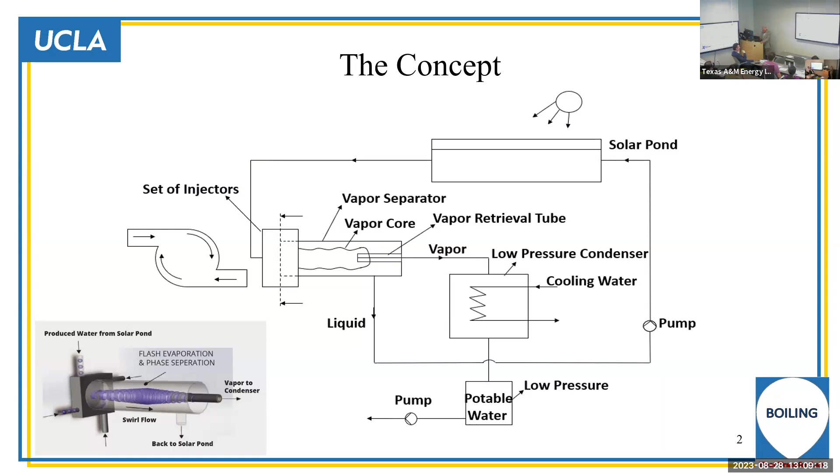There are a number of existing technologies for desalination: multi-effect distillation, multi-stage flash evaporation, and reverse osmosis. Reverse osmosis uses membranes to separate pure water from saltish water, and this is quite popular. However, this requires quite a bit of energy consumption.

Then there's multi-stage flash evaporation. There you use low pressure steam to heat salt water, and then the salt water flashes when the pressure drops below a certain value, so the saturation temperature is lower than the saline water temperature. The vapor that is produced is sent to a demister to get rid of droplets, and then the vapor goes over a condenser to form potable water, and in turn the saline water is heated. So this is the process.

Multi-effect distillation is similar, but in this case seawater is sprayed over heat exchanger tubes. These heat exchanger tubes carry steam, so steam condenses, and the energy that is released is utilized to heat the saline water. As the pressure drops, the saline water becomes superheated, flashes, and vapor is produced. That vapor goes through a demister to get rid of droplets, and then the vapor is sent to a heat exchanger and the process repeats.

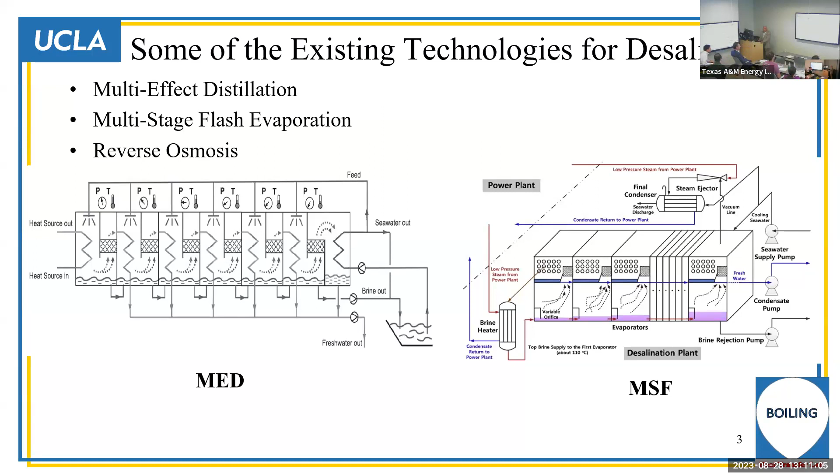So my talk is organized as follows. First, I give you a brief history leading to this concept. We started with just simple phase separation in the absence of gravity.

This work started when President Reagan had the Strategic Defense Initiative in the late 1980s. At that time, the idea was to have a nuclear power plant in space, and to produce electricity, one of the concepts was to use a Rankine cycle.

In a Rankine cycle, you produce steam, and now you have to separate steam from the water. Normally gravity helps you separate the two, but in space there is no gravity. So we had to come up with a concept to separate water from steam. So here we developed this phase separator.

Subsequently, we used this concept of swirl flow for enhancing single phase heat transfer and two phase heat transfer. Then I'll come to the current concept and what we have demonstrated, and lastly give you some simple cost analysis of producing potable water from seawater using this concept.

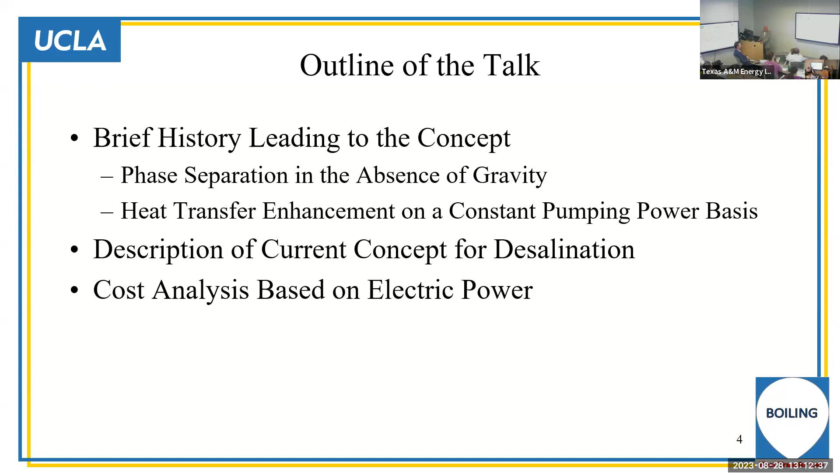So going back to phase separation in the absence of gravity, what we proposed was that we place a set of injectors on the separator tube. These injectors were pushing the two-phase mixture, air and water, or steam and water, tangentially into the tube, and they were also inclined at about 70 degrees to the main axis so that we impart axial momentum to the two fluids as well.

As the fluids come out of the injectors, again centrifugal force pushes the liquid out. Gas is formed as a core in the middle, and we take the gas out through a retrieval tube - at that time we called it a vortex finder - so that you're separating the two. And the liquid goes out and goes to the main source.

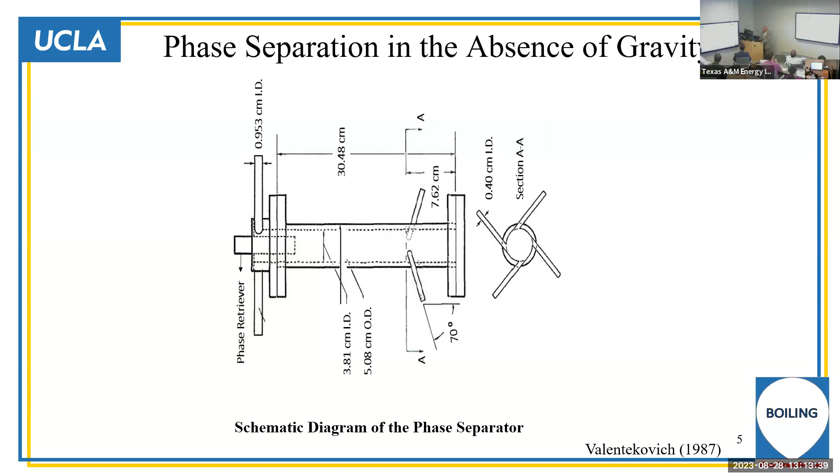This is a picture that was taken in the 1980s. You see in the middle is the gas core, and on the left-hand side is a vortex finder or retrieval tube. You can see the gas core just feeds into that retrieval tube.

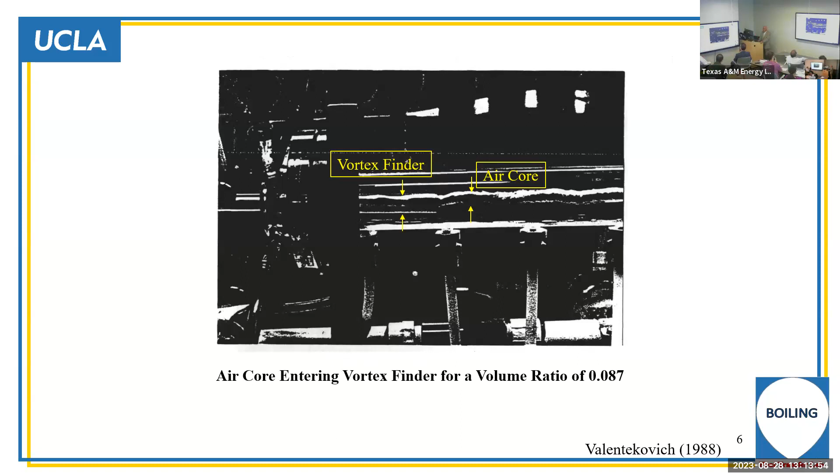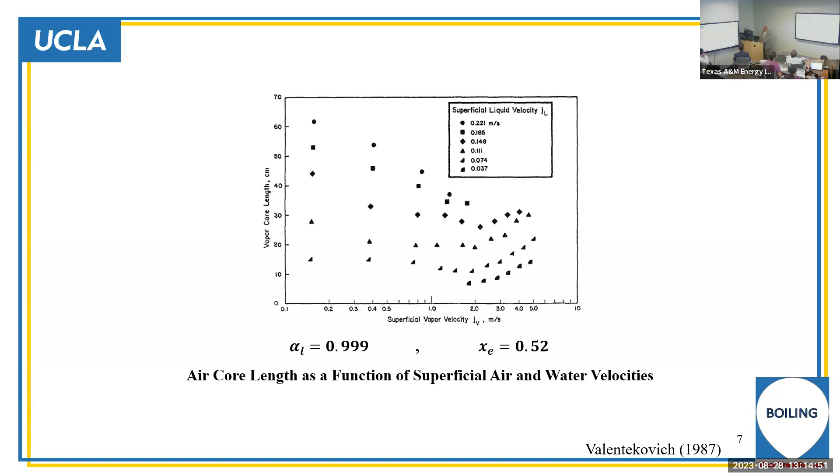That work was funded by the Strategic Defense Initiative. Next, we moved on to using this swirl flow enhancement for single phase flow. We got funding from the Gas Research Institute when they wanted to improve heat transfer in their heat exchanger tubes.

Here we have a set of 4 injectors placed on a tube which is electrically heated, and a single phase liquid or gas enters through these injectors, creating tangential momentum. We define tangential momentum as the square of the mass flow rate of the injected fluid divided by the density of the fluid and the area of the injectors. Then there's a total momentum transfer rate, based on the total mass through the tube, since there is some axial flow as well.

On the left-hand side, you see the ratio of Nusselt number, a dimensionless heat transfer coefficient, non-dimensionalized with that for fully developed flow. The triangles are for single phase axial flow, and you can see that within about 5 to 6 hydraulic diameters, the enhancement to developing flow dies down and you reach a fully developed condition.

But with tangential injection, we find that the enhancement near the inlet increases with the momentum ratio, and for a momentum ratio of about 5.2, we got an enhancement of a factor of 5. This enhancement decays but persists up to about 70 hydraulic diameters. That's quite long.

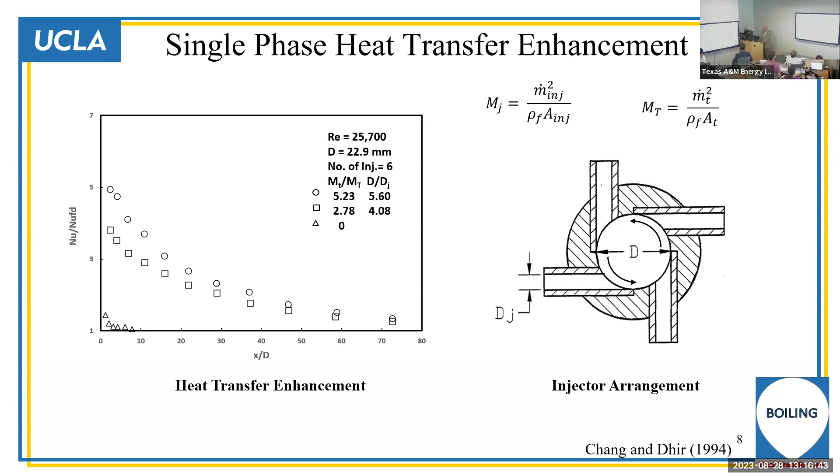Then we wanted to see why swirl flow enhances heat transfer, and what the mechanism is. First, we measured the temperature profile in the tube, and found that because of the centrifugal force, colder fluid was pushed out, so the temperature away from the middle of the tube was less than that at the middle.

These data points show the temperature profile with swirl flow, and the dotted line is turbulent flow fully developed in purely axial flow. You see in this case there's quite a bit of depression in the temperature and a very steep gradient near the wall.

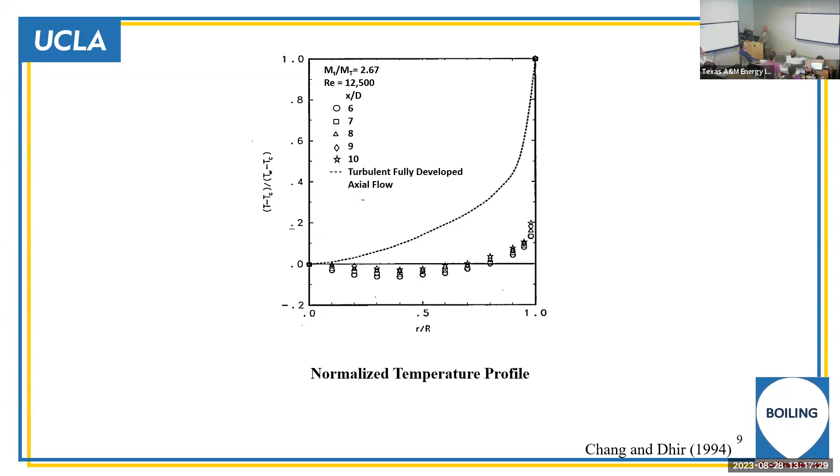Then we wanted a correlating parameter. Momentum ratio is one way of doing it, but we defined swirl intensity, which is the integrated value of the rate of tangential momentum divided by the rate of axial momentum. Swirl intensity was the key parameter we used for correlation of the data.

On the left-hand side, you see a plot of enhancement in heat transfer as a function of swirl intensity. As we increase the swirl intensity, heat transfer improves. For a swirl intensity of about 5, heat transfer is enhanced by more than a factor of 2.

These data were obtained at axial distances greater than 6 hydraulic diameters.

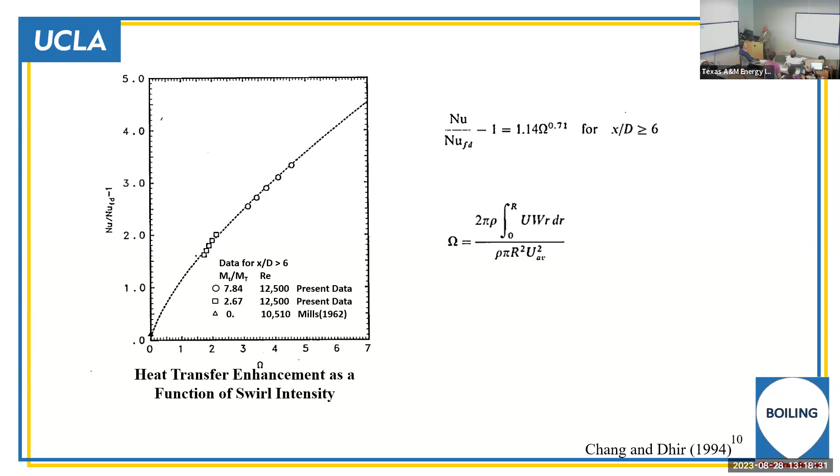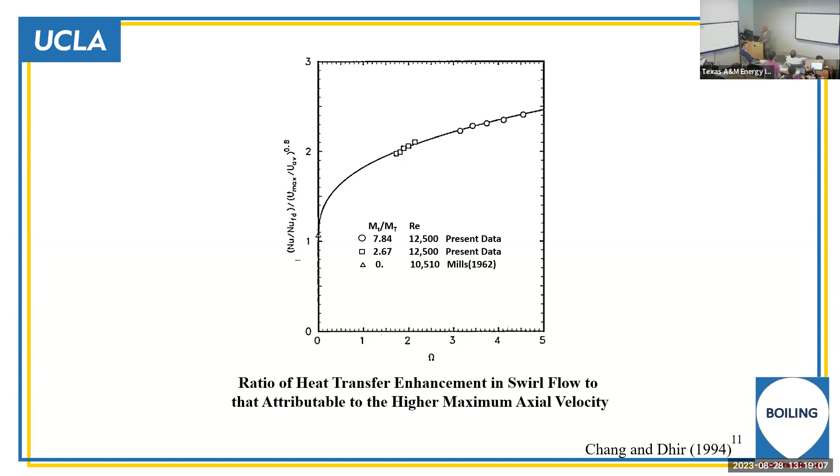Then we found that this enhancement would be related to the maximum axial velocity in the tube. When we normalized the data with maximum axial velocity, it correlated well with the swirl intensity, indicating that swirl increased the axial velocity near the tube surface. Again, the enhancement increases as swirl intensity increases.

Then we measured the turbulent intensity in the tube using an anemometer, measuring 3 components of turbulent intensity, integrated over the cross section of the tube and normalized with the average axial velocity. On the left-hand side, you see turbulent intensity as a function of swirl intensity, increasing almost linearly with swirl intensity.

So this tells us that swirl not only increases the axial velocity component near the wall, but also increases turbulence intensity, which improves mixing and heat transfer. So there are two mechanisms of enhancement of heat transfer this way: increased axial velocity and increased turbulence.

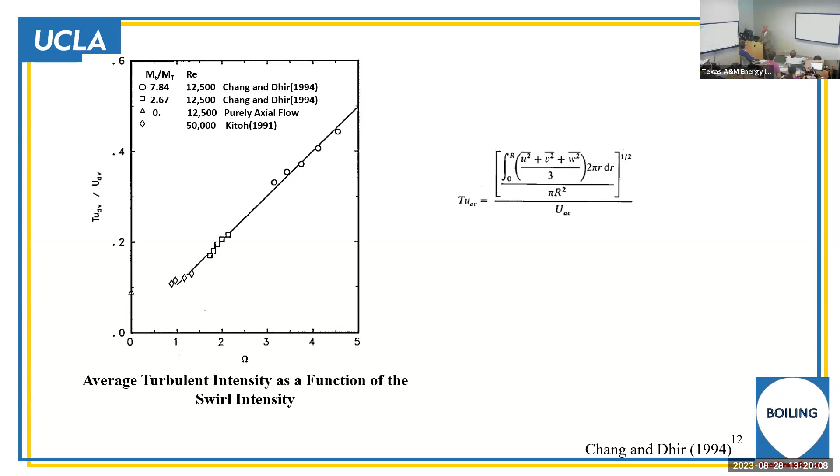We got a patent for this work, and it was, as I said earlier, supported initially by the Gas Research Institute. Then after this, we said, why not two-phase heat transfer, boiling?

Boiling is already associated with very high heat transfer rates, but with swirl, could we do better? In boiling, critical heat flux occurs when vapor bubbles combine on the wall because the vapor production rate exceeds what is removable, so bubbles accumulate and blanket the surface with vapor, causing a drastic reduction in heat transfer.

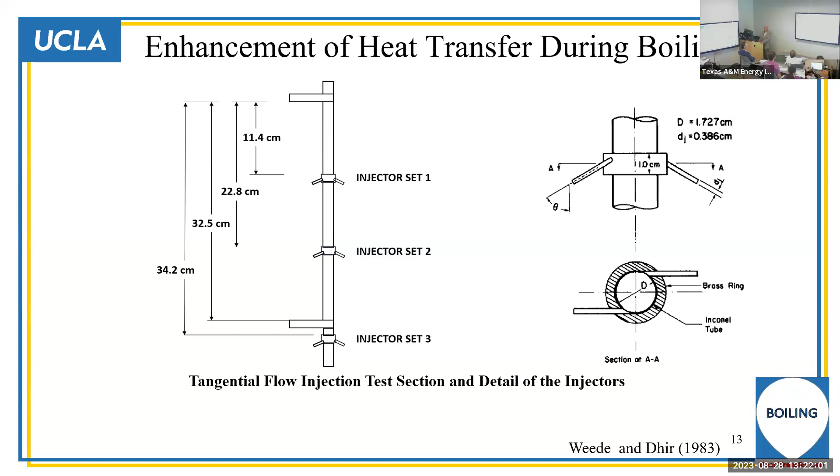Here is the enhancement for single phase, again using liquid rather than gas, as a function of axial distance for different momentum ratios. We see the same behavior: enhancement is much higher with tangential injection and lasts for long distances, compared to axial flow shown by triangles, which very quickly becomes fully developed in about 6 to 7 hydraulic diameters.

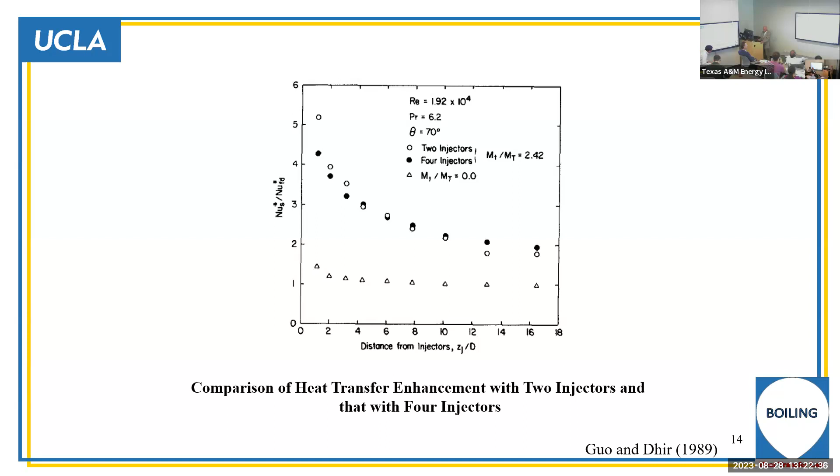Let's look at the two-phase boiling heat flux. The circles are purely axial flow, and the triangles are data with tangential injection. With tangential injection in partial nucleate boiling, heat transfer is enhanced quite significantly. In fully developed nucleate boiling there is not much effect, but critical heat flux with injection is higher than for pure axial flow. This is for an axial location about 6 hydraulic diameters from inlet.

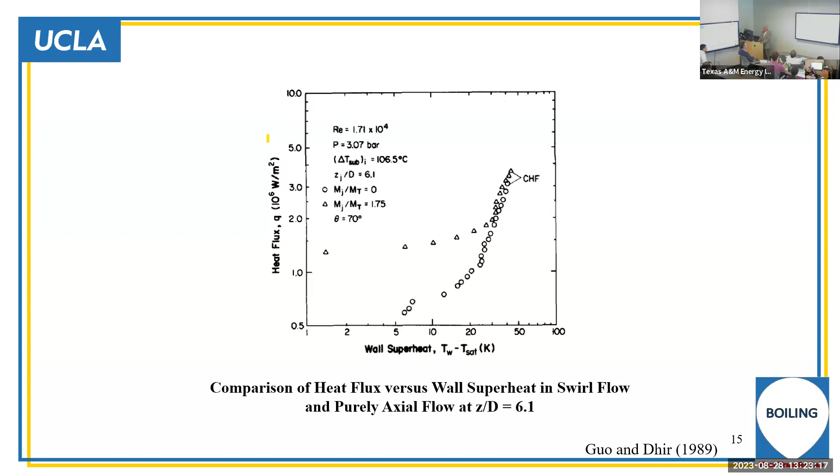Next we looked at 13 hydraulic diameters from inlet. Similar behavior: critical heat flux is again higher with swirl than for pure axial flow.

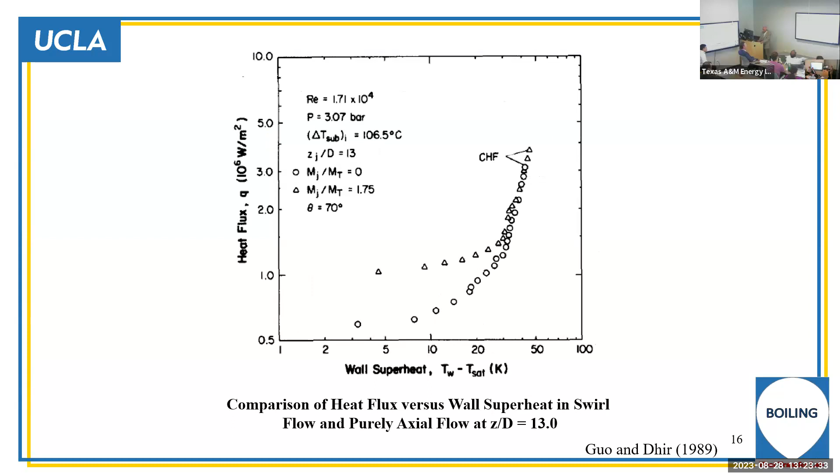When I showed this result to the person at DOE, he said, this kind of science I am not interested in. People are not really looking forward to new things, they want something traditional.

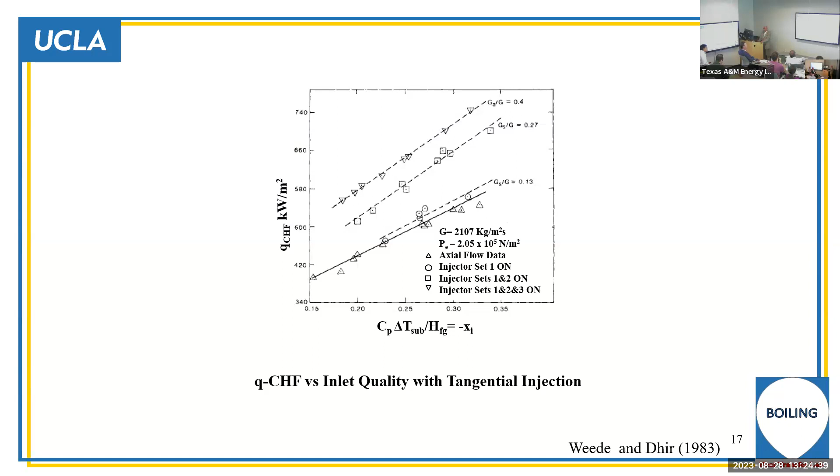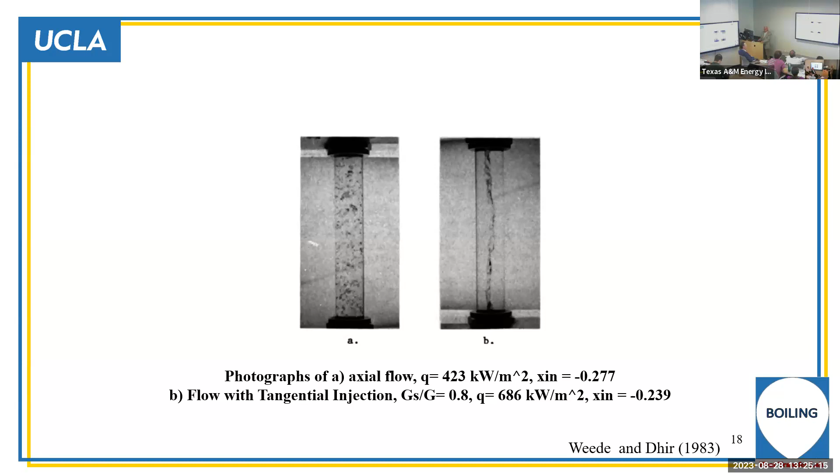Now, in this world there is no such thing as a free lunch, except for what we got to drink, so you have to pay some penalty. Most often people claim they enhance heat transfer without paying a penalty, but there is always something.

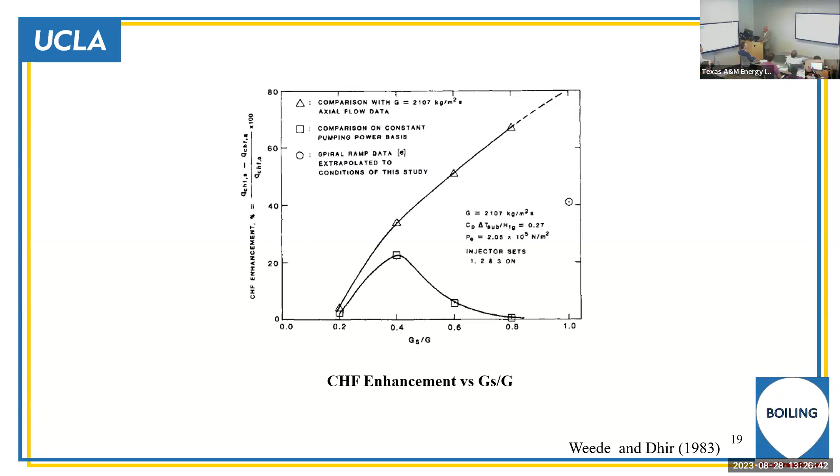Next, let's go to the current concept.

For the current concept, since in the lab we don't have a solar pond, we use electrical heating. We have a primary tank from which liquid goes through a heated section to reach a certain temperature, then flows through two injection tubes connected to two injectors placed on a separate tube. As the liquid flows through the tubes, the pressure drops, the saturation temperature drops, and when it is less than the liquid temperature, the liquid becomes superheated, flashes, and produces vapor.

So that is happening in the first stage. The vapor core forms, and the vapor from the vapor core is taken out. However, there's a problem - some droplets get entrained in the vapor. So we place a second stage next to the first stage. The vapor coming out of the first stage is fed to the second stage so that we can get rid of any droplets that are entrained.

The vapor from the second stage goes to the condenser and gives you the potable water. The liquid that is separated goes to a secondary tank, then the primary tank, and all that liquid is sent back to the primary.

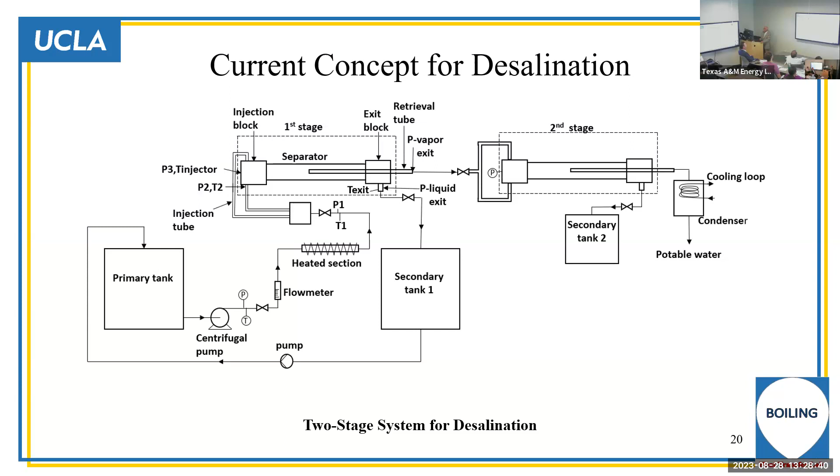As the vapor flows through the retrieval tube, there's a pressure drop.

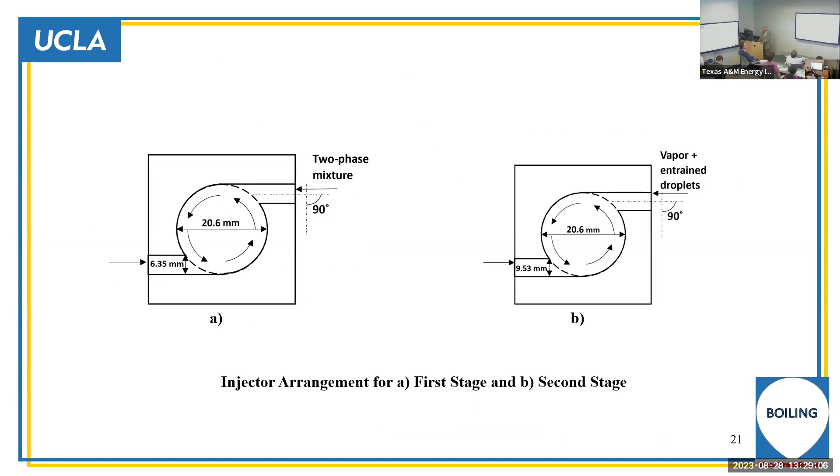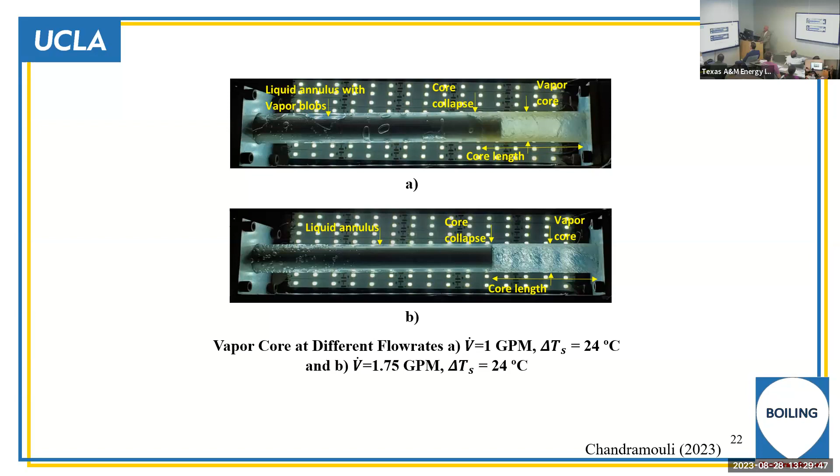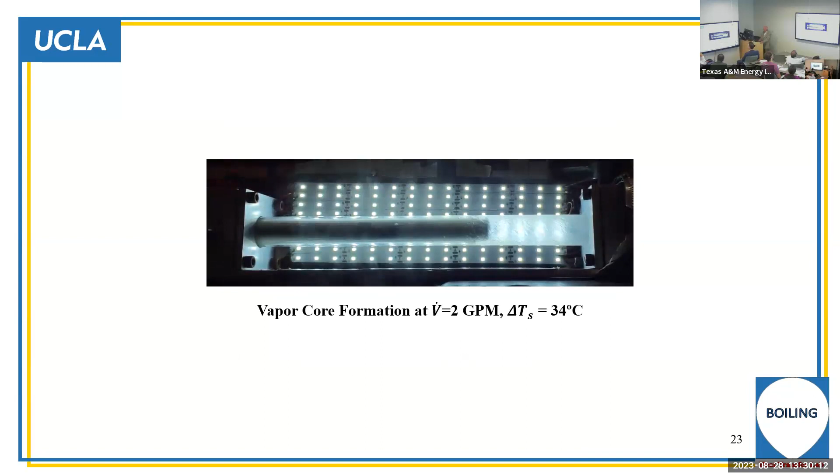Now, before I go further into what the correlations are, I want to define certain parameters. How do we know this system is working the way it is working? What is its performance indicator?

So for that, we first define a thermal conversion efficiency. Thermal conversion efficiency is simply the ratio of the maximum possible temperature drop. You have inlet temperature of the liquid, and then you have temperature of the liquid at the injector exit - that temperature would be more than the saturation temperature based on the exit pressure. So we define delta T injector, divided by the maximum possible temperature drop, which is the temperature of the liquid at the inlet minus the saturation temperature of the pressure at the exit. That exit pressure is the condenser pressure.

So this is thermal conversion efficiency, then phase separation efficiency - how better we are doing in getting rid of these droplets. You don't want the droplets because those are salt water, and that would reflect on the quality of the water that we produce. So we want to determine phase separation efficiency.

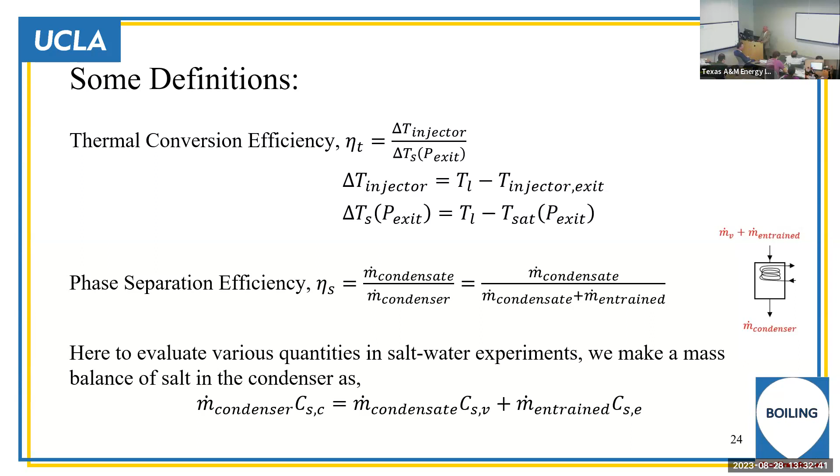In the vapor, salt concentration is 0. So we find that the mass flow rate of the entrained liquid is simply the mass flow rate of the condenser times the ratio of the salt concentration in the condenser divided by the salt concentration in the entrained liquid. In the entrained liquid, salt concentration is the same as your original water. In the condenser, you measure it - so what is the salt concentration?

So knowing the entrained water, we can calculate the mass flow rate of the condensate, and from then you can determine what the separation is.

Another parameter we define is collection efficiency. When we separate the liquid and vapor, some of the vapor goes with the liquid that we took up - that is your product which is being wasted. So we define collection efficiency, which is the mass flow rate of the condensate divided by the mass flow rate of vapor.

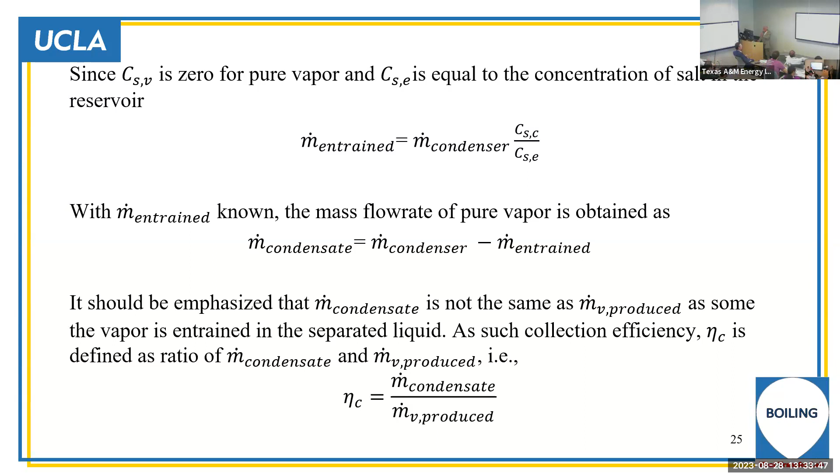So these were the indicators of the performance of the system.

So next we wanted to see how these parameters we measure compare with simple-minded predictions. The quality at any location is simply the product of specific heat and the difference of liquid temperature at the inlet minus the saturation temperature at the local pressure, divided by the latent heat of vaporization. Quality can be related to the void fraction, the density ratio, and a slip factor, and the pressure drop, as I said, occurs because of friction and acceleration.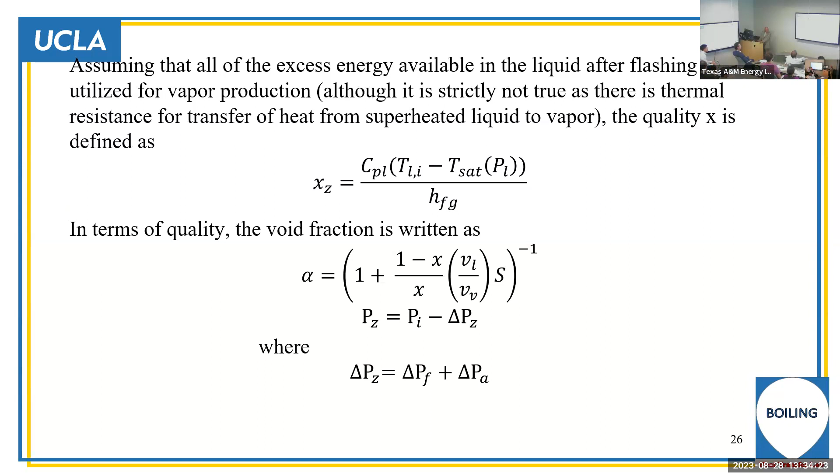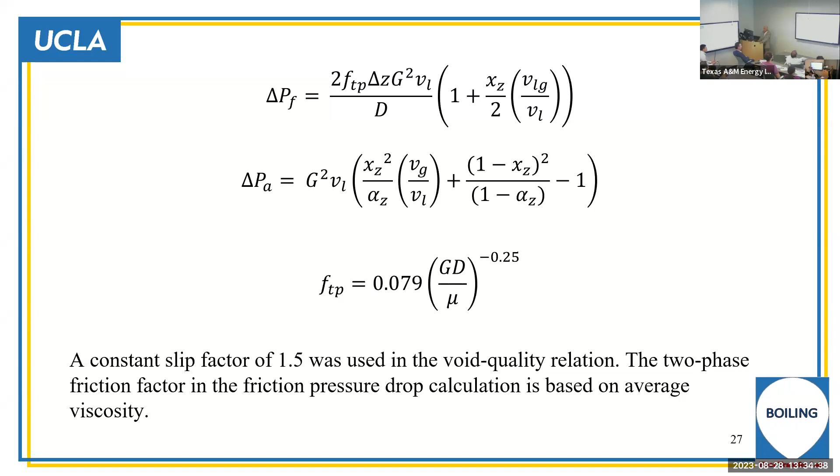For friction pressure drop, we simply used a two-phase friction factor, and acceleration pressure again is related to the quality and the void fraction. The slip factor we assumed to be 1.5.

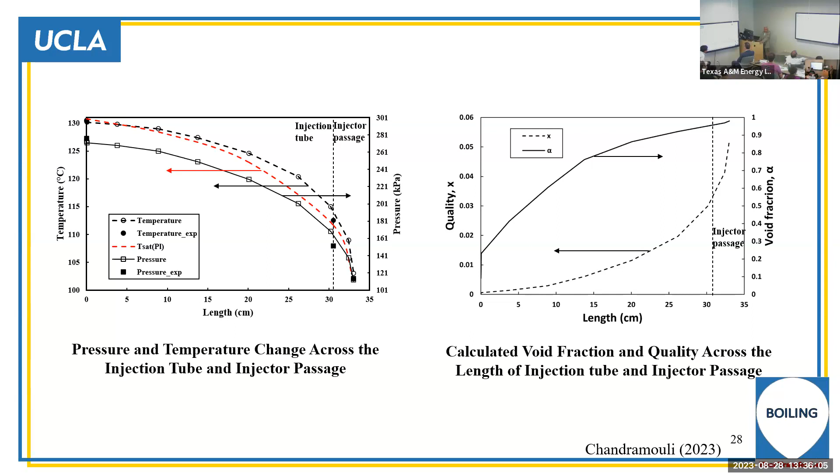On the right-hand side, you see a plot of quality and void fraction. At the exit of the injectors, the quality can be about 5%, but the void fraction can be about 95%. So most of it is vapor.

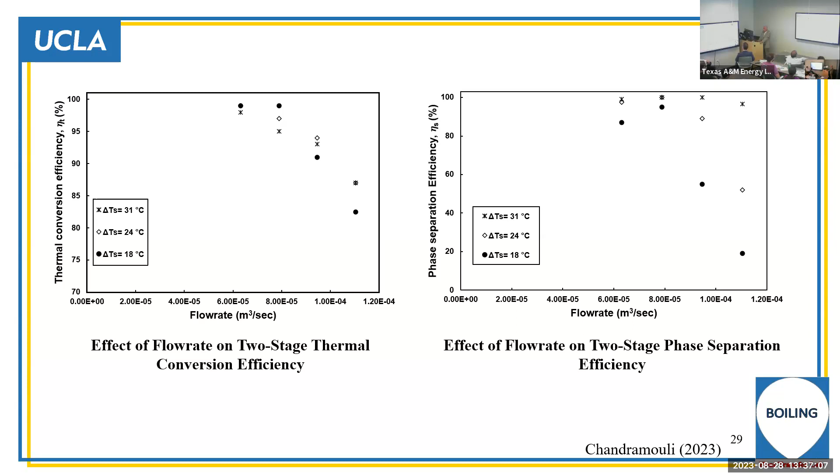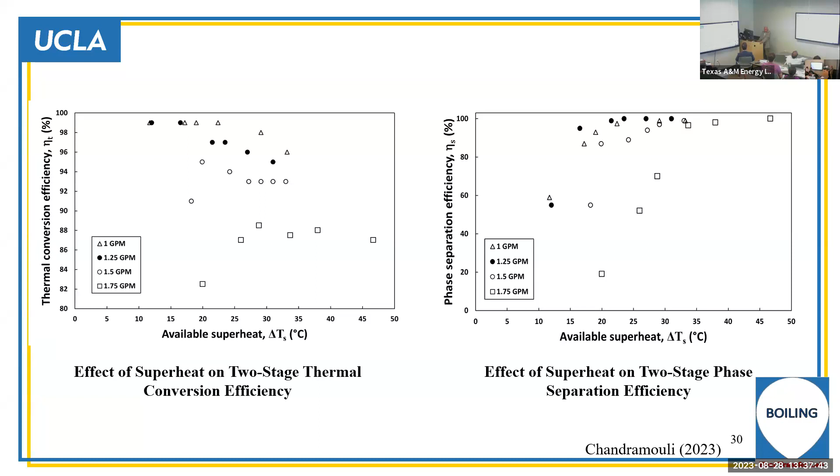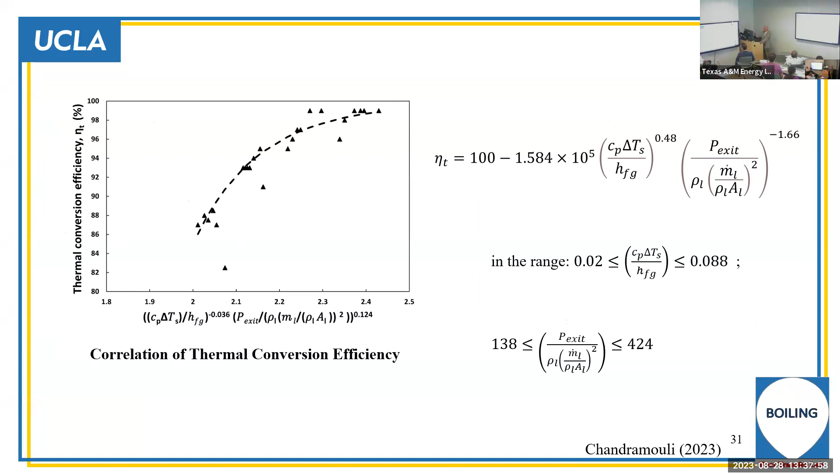These are the correlations for thermal conversion efficiency as a function of quality, pressure at the exit, and mass flow rate, with the range of parameters spanning a factor of about 4. Similar correlations were developed for phase separation efficiency, which as you can see equals about 99%.

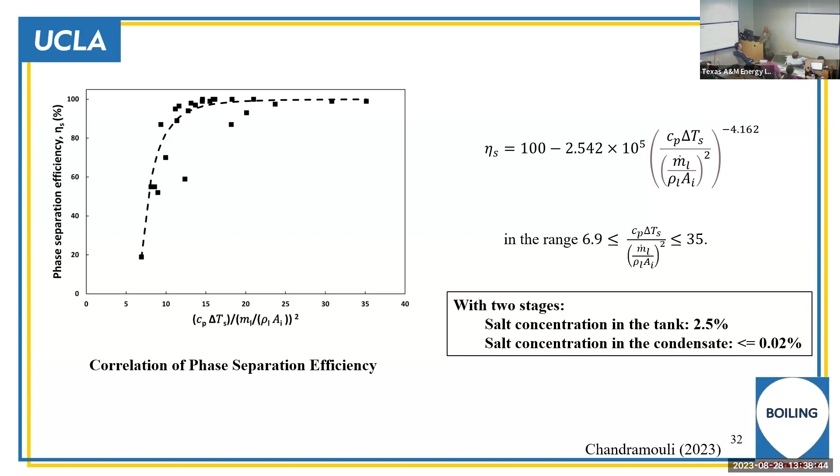The key message here is this two-stage system. Our initial salt concentration in the tank was 2.5%. In the water collected in the condenser, the salt concentration was 0.02% - this is like potable water. So in a way, we have demonstrated that we can take salt water from the sea and make it potable water, with just that simple system.

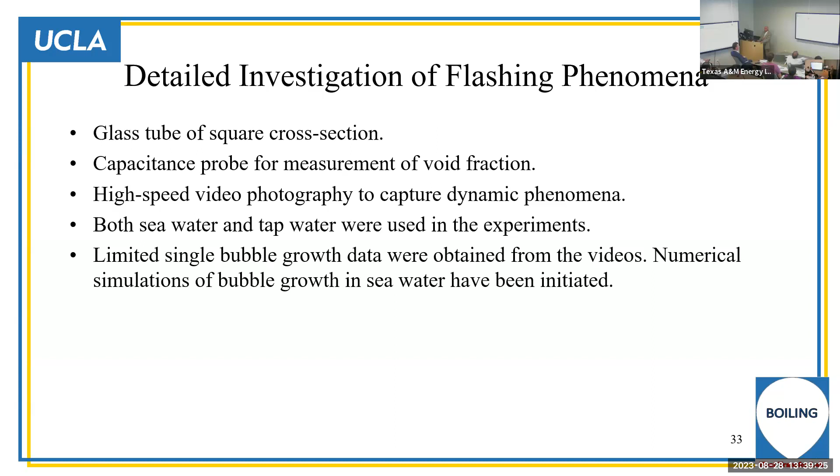This is a sketch of the square tube - a quartz tube which we used for installing the capacitance probes - and we have pressure and temperature taps. Again, with the capacitance probe, we could determine the void fraction.

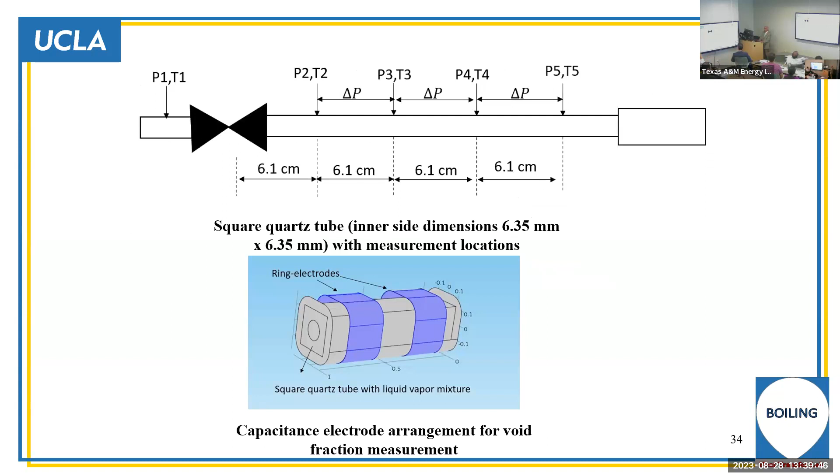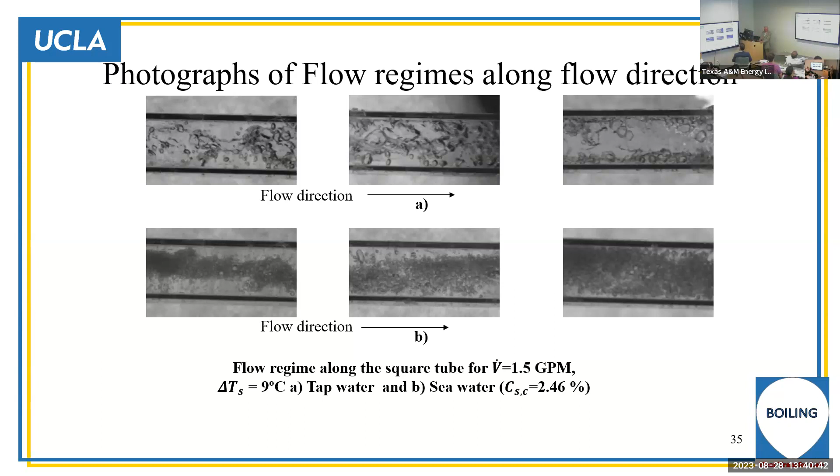These bubbles stay the same. This cluster is there, and also you see there is no activity on the walls for this case, whereas for tap water, there is activity in the walls. So this kind of information we need for better modeling.

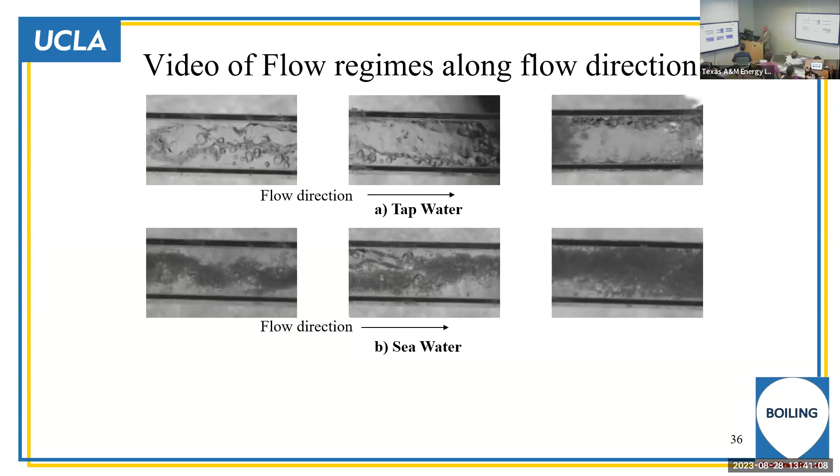This is a set of videos or pictures from the measurements of high-speed videos. We are plotting on the left-hand side the pictures of the flow regimes as they develop in the axial direction for different flow rates. On the right-hand side, we have void fraction as a function of distance along the tube for different flow rates.

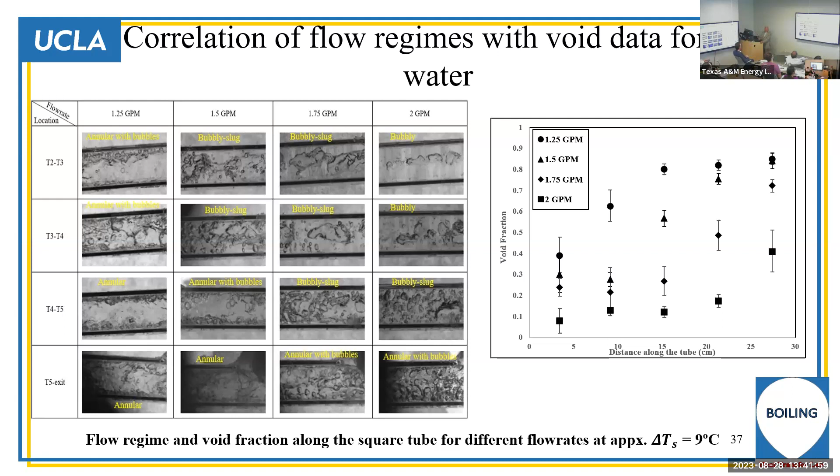So what we find is that void fraction increases in the direction of flow as more flashing occurs, and as the mass flow rate of the liquid increases, the void fraction decreases. The pictures on the left-hand side plus the void fraction measurement on the right-hand side can now be used to build a better statistical model for the process.

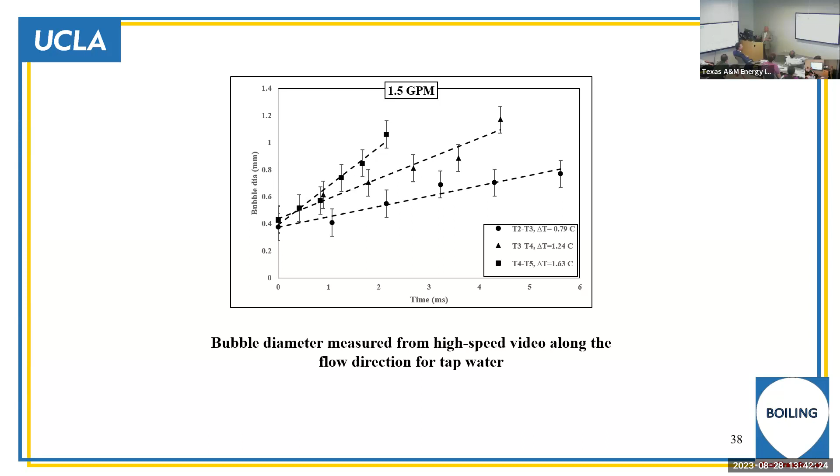This is a measurement of a single bubble flowing in this liquid, and as you can see, the bubble seems to grow linearly with time, and as we increase the superheat, the rate of increase of bubble size increases, as we would expect.

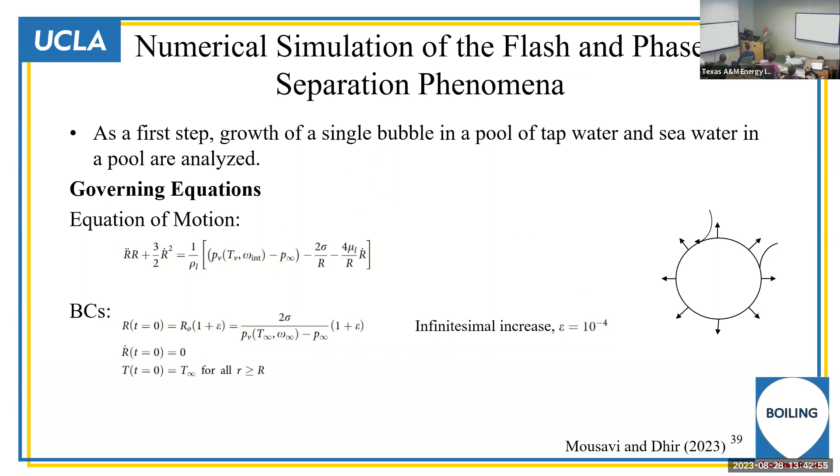Then we did some modeling as a first step in the numerical simulation of the flash evaporation phase separation phenomena. Here we're just looking at a single bubble in a pool, but with seawater, and pressure could be decreasing with time. So basically, we solve the inertia equation or the momentum equation. We account for the pressure difference because of the capillary, we include the viscous stresses, and then we solve for the energy equation and also the salt concentration.

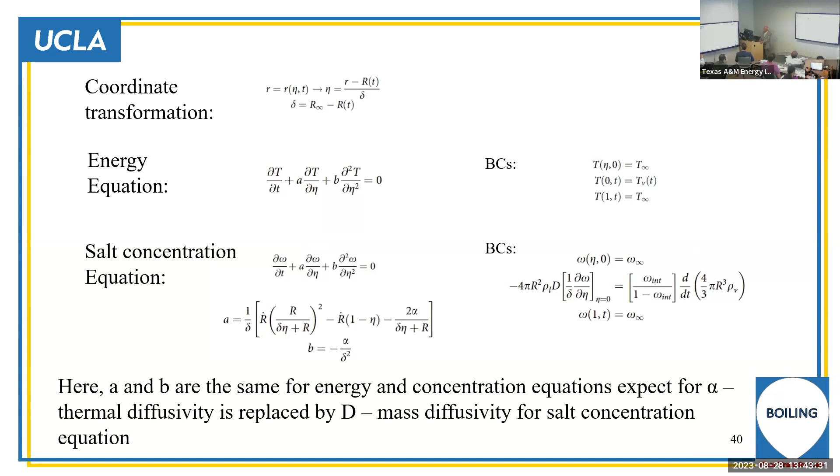Here is the result for a bubble radius as a function of time for different salt concentrations. As you see, as we increase the salt concentration, the growth rate of the bubbles decreases. So the presence of salt decreases the effectiveness of the process.

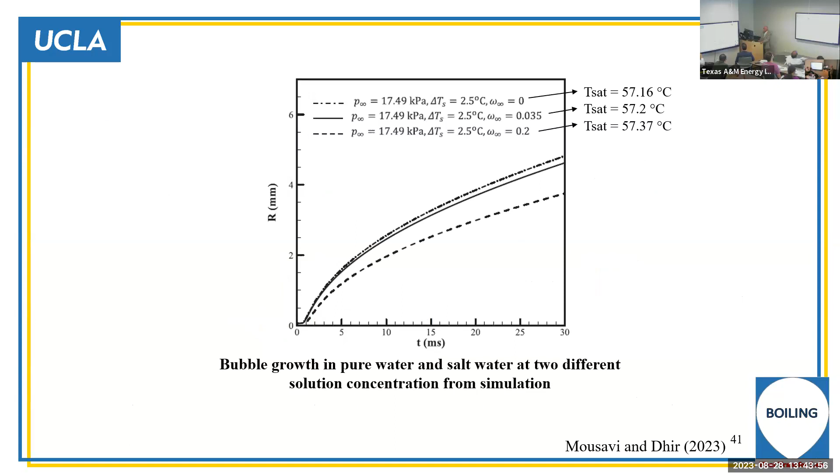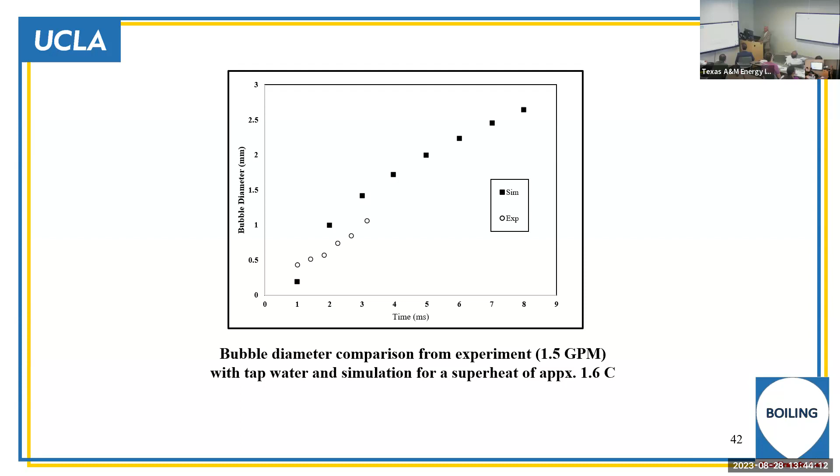Now this is just one comparison. The solids are the prediction from the model. The dotted, open circles are the data from the videos over the first 3 or 5 milliseconds. And you can see the comparison is okay, but it's not as good as we would expect.

Next, we made some simple cost analysis, and these are very preliminary, to see how expensive potable water produced would be with this concept. Again, we are using electric power, so the cost is based on the electric power.

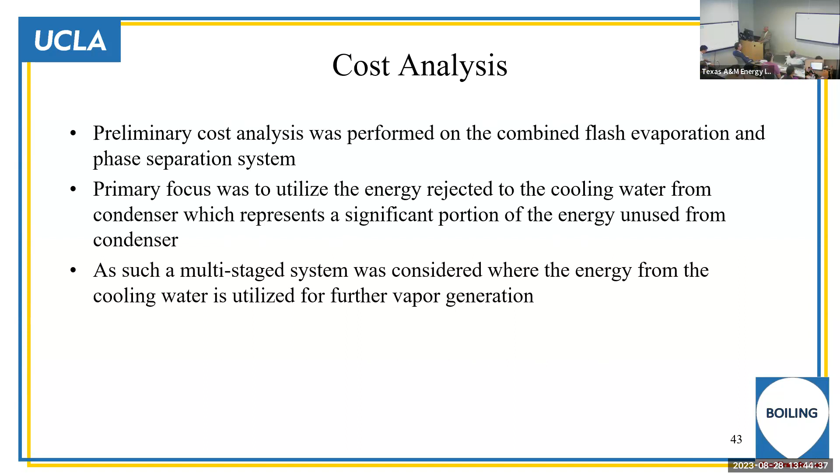Main source of energy loss is the condenser water, because the vapor you condense releases latent heat of vaporization that is picked up by the cold water flowing through the tube. If you throw it away, you have lost that energy. So you want to use that energy that is deposited into the cold water going to the condenser tubes.

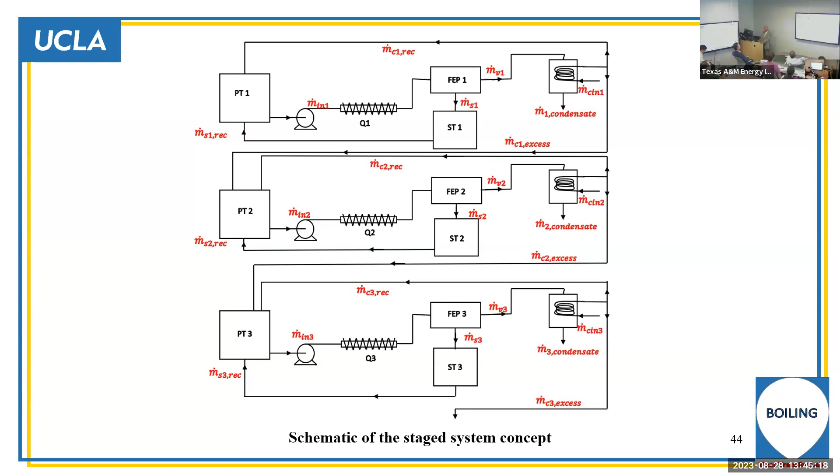So we developed a multi-stage process where the water exiting the condenser goes to the second stage, where we go through the same process again, and so on. We did up to 6 stages, and here are the results of that.

Because in each stage we are increasing the amount of vapor that we produce, although the amount is less because the rate at which water is flowing to the condenser tubes is less than the rate at which water is entering the flash. You see that in the first stage we produce only 20.25 grams per second of vapor, but by the 6th stage we double the amount of vapor produced. And the cost, or the electric power consumed, decreases by a factor of almost 50.

So for 6 stages, we are consuming about 13 kilowatt hours per cubic meter of water produced. Now, if we use 6 cents per kilowatt hour, that is 78 cents per meter. If you increase that to 10 cents, 15 cents, this cost will go up. So this is based on how expensive the electric energy is.

But again, here in the lab, we are using electric power. But if I were in the field, I would probably be using solar power.

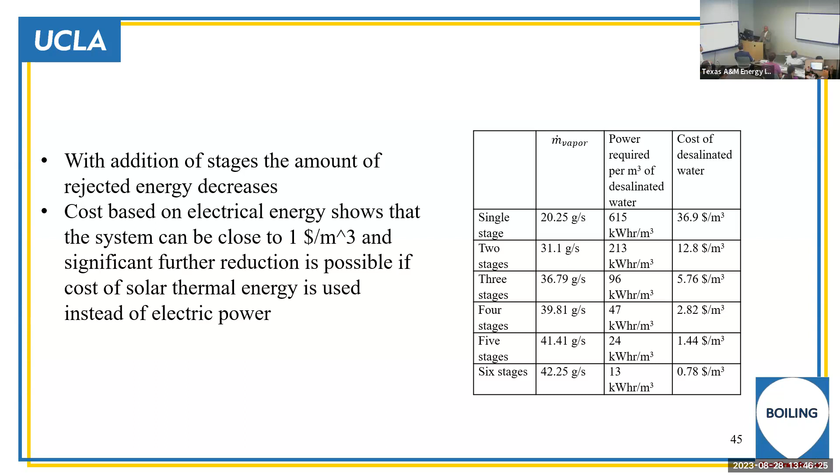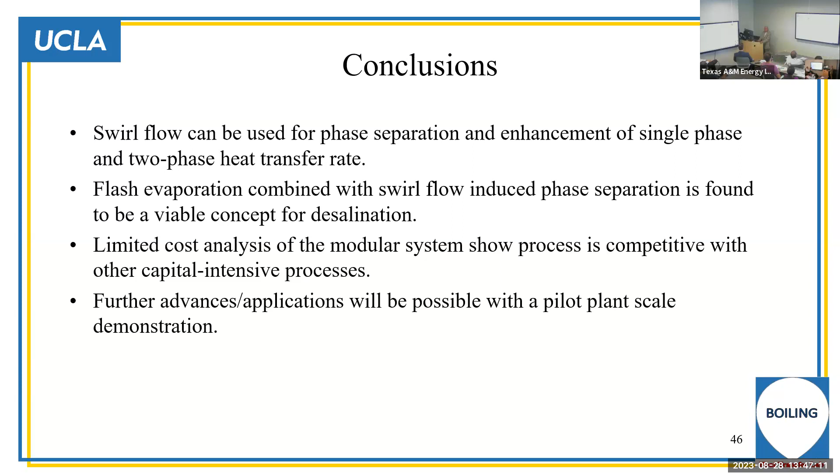So, finally, to conclude, I hope by now you are convinced that swirl flow is an effective mechanism or approach for phase separation and for enhancement of single and two-phase flow heat transfer. Flash evaporation combined with swirl flow is an effective and viable concept for desalination. Limited cost analysis of the modular system shows the process is competitive with other capital-intensive processes, and we can make further advances and even increase the number of applications to be developed at scale. Thank you.